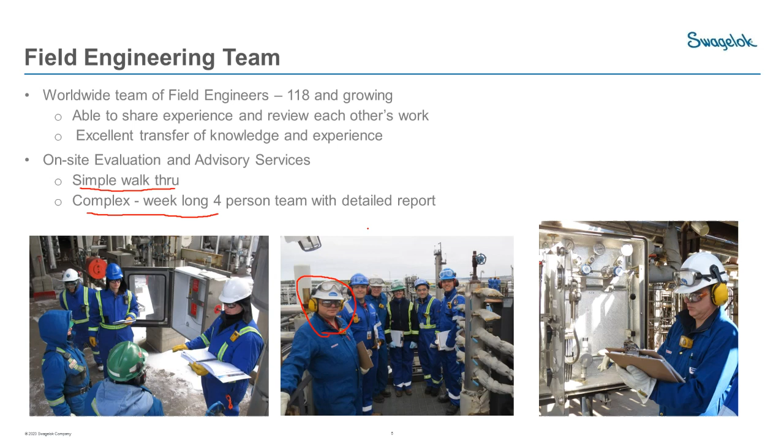One of the things that we have now as a challenge is COVID-19. So rather than send an entire team of folks out to a site, what we are doing is we'll send a limited number of local folks to that site, and then either have them do a virtual tie-in of others off-site using a virtual headset, or they will bring that information back to the off-site folks, and we'll work together on generating that report. So we've continued to do these assessments, and it's been actually quite successful and interesting to do them in the virtual environment that we have today.

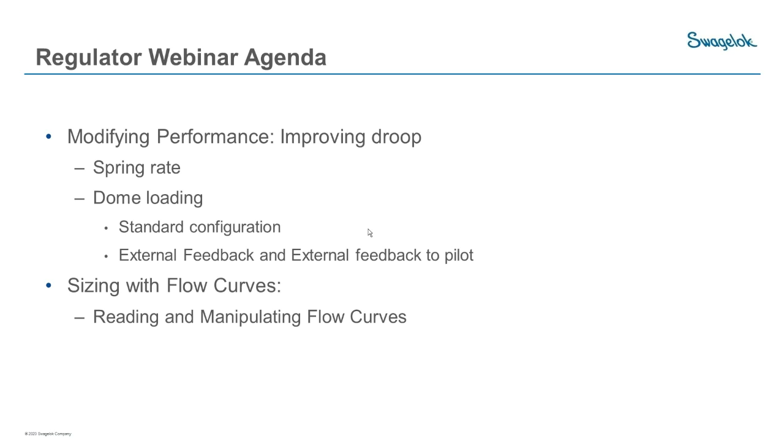A little bit of review from the last presentation. The question, what is a pressure regulator, may seem a basic question, but it's important to realize that it's a mechanical device that's designed to control either upstream or downstream pressure, and it responds to system changes, such as flow, pressure, and temperature. What's important to realize is that a pressure regulator controls pressure.

It does not control flow. So it will modulate flow in response to pressure requirements, but in and of itself, it is not a flow controller. You can't set it to a certain flow. It is going to respond to flow demand and open and close to maintain pressures. So that's a really key takeaway, is that while flow gets modulated, it does not get controlled. It's the pressure that gets controlled.

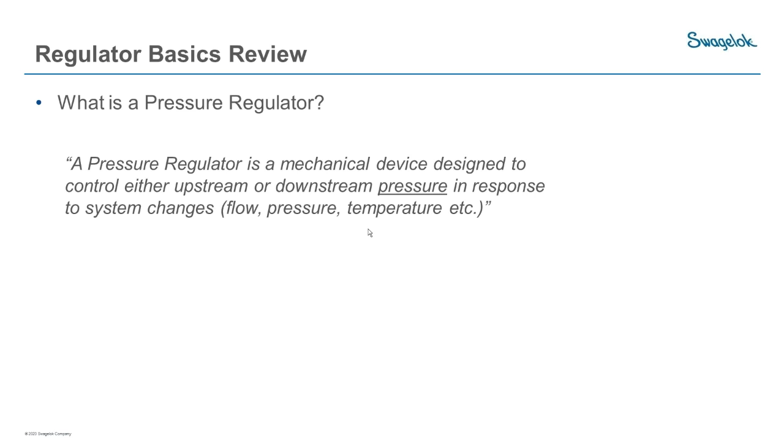So we talked about the balance of forces in a pressure reducing regulator. You'll notice that a lot of times I would call this a forward acting regulator, and simply that means that we have high pressure on one side and a controlled low pressure on the other. The balance of forces equation, we have our set spring up here, our range spring. Whatever setting we apply to that, these forces down below, the outlet pressure force, our inlet pressure force, and our poppet spring force will be equal and opposite to that once the regulator balances.

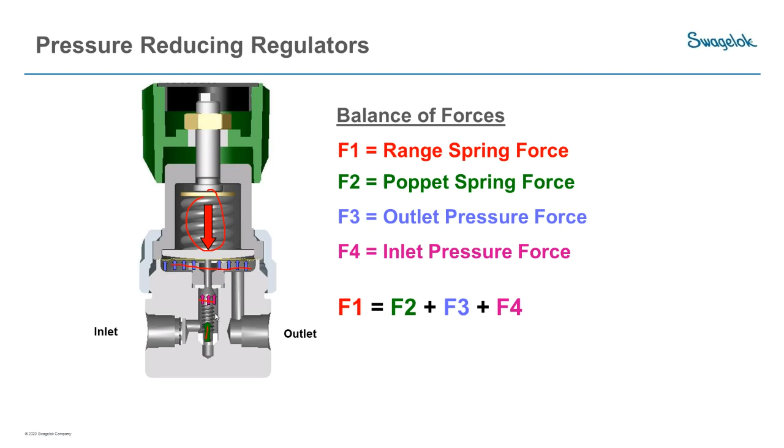Similar with the back pressure regulator, we'll have a balance of forces. You'll notice this back pressure regulator lacks the poppet assembly that the forward acting regulator has. There are back pressure regulators with poppet assemblies in them. This image simply is a regulator that does not have that poppet assembly.

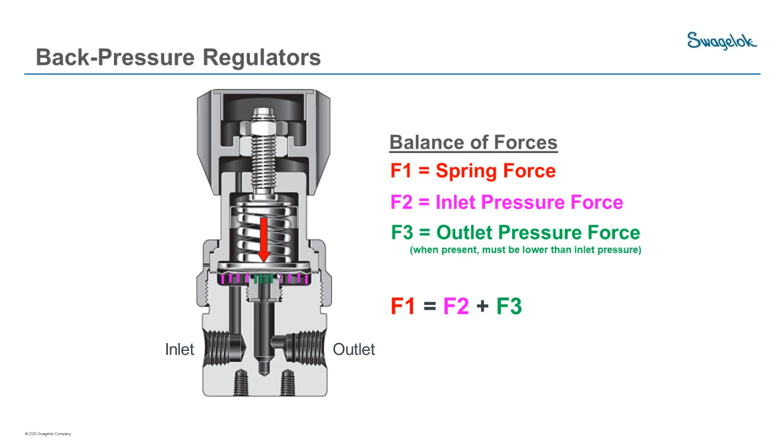So in our last presentation, we talked about these performance criteria. We talked about droop, which we'll look at a lot more today. Choked flow, that maximum flow you can get through the regulator. Creep, what happens to a regulator when it's shut off, but there's some contamination on the seat, where the pressure increases on the outlet. Accumulation, which is similar to droop, but for a back pressure regulator. Lockup at zero flow, Joule-Thomson effect for temperature changes through a regulator, and the optimal flow part of the curve and supply pressure effect. So today, though, we're going to focus on droop.

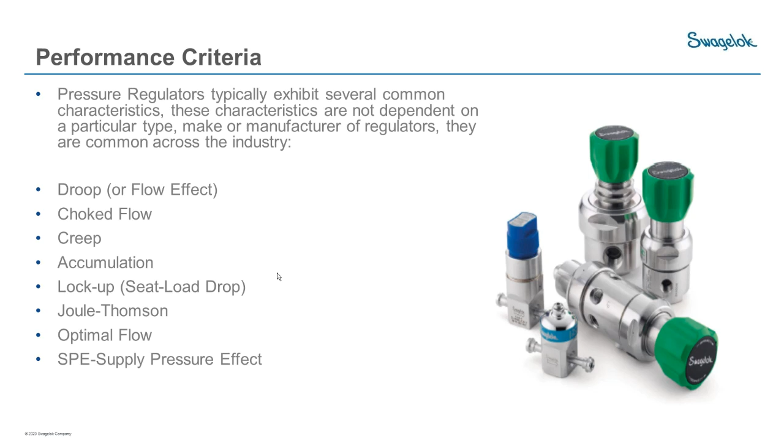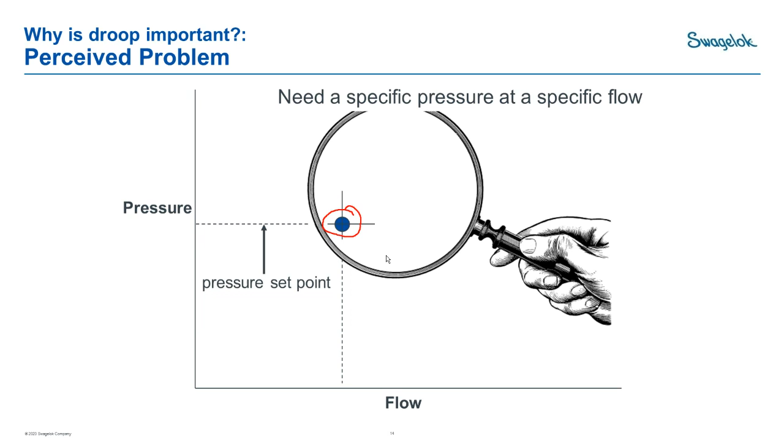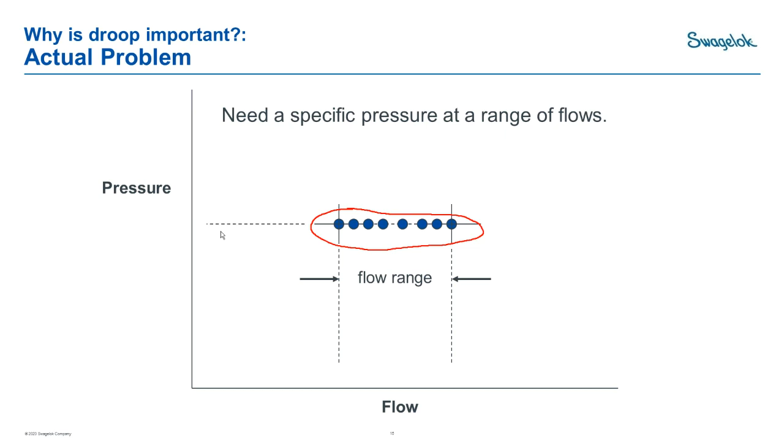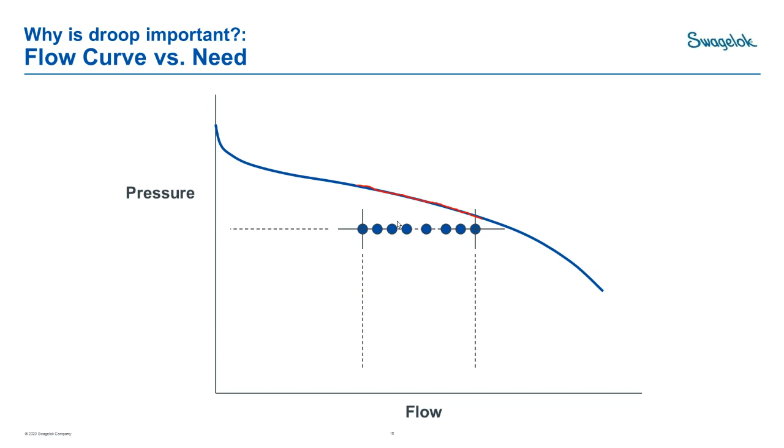So the challenge that we have with a regulator is that the reality of the matter is that we have a certain flow and pressure that we have in mind that we want to operate at. However, the reality of the situation is that our processes are going to work over a flow range, but we still want to maintain that pressure over that flow range. But the reality is that while this is what we want to do, the challenge is that our device is going to follow, our regulator follows this flow curve. So it becomes a challenge of how do we set this device in order to operate well for us.

Similarly, if we would set it at the highest flow, as our flow decreases, our pressure is going to increase to a point where it's no longer acceptable. So that's not optimal in this case.

We could set it out here at just the start of flow, but then our pressure is unacceptably high for our operating conditions. So it's really a challenge.

We could certainly set it to the middle, which is the best practice, really—set your pressure at the middle of your flow range—but maybe that's not good enough. In this case, now none of our pressures really meet what we intended to do with our process.

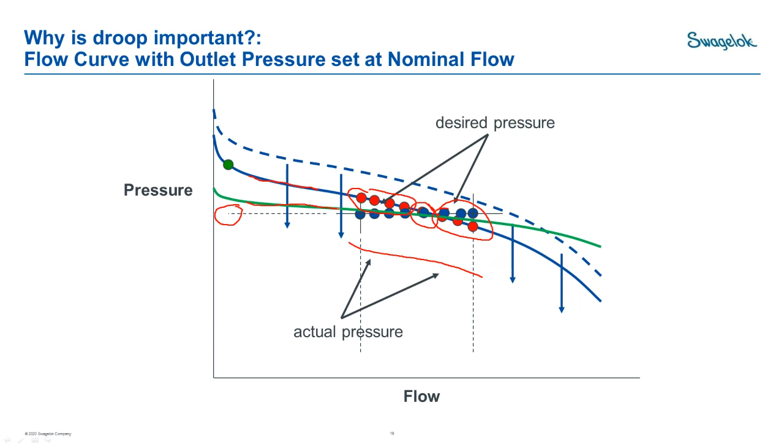So in this case, we really need to come up with a different way of managing our pressure over flow. We really need to flatten that curve, and that means changing the device's characteristics. This characteristic line is how the device works, so we need to go to a different device to get this flatter curve. By different device, I don't mean a totally different system—I mean a regulator with a different internal mechanism.

So let's review why that flow curve exists. We have our balance of forces equation. F1 here is our set spring, and F3 is our outlet pressure force.

When a regulator is balanced or near balance, if our inlet pressure stays the same and our poppet spring force doesn't change by much, we assume those are fixed numbers in this equation. That means whatever F1 does, F3 is doing, or vice versa—whatever F3 does, F1 will follow suit.

Here's what happens when flow demand increases on the outlet side of the regulator: this poppet, in order to allow more flow, needs to move down. When it moves down, this loading plate moves down too, which means this spring is extending—so the spring is actually losing some of its set force.

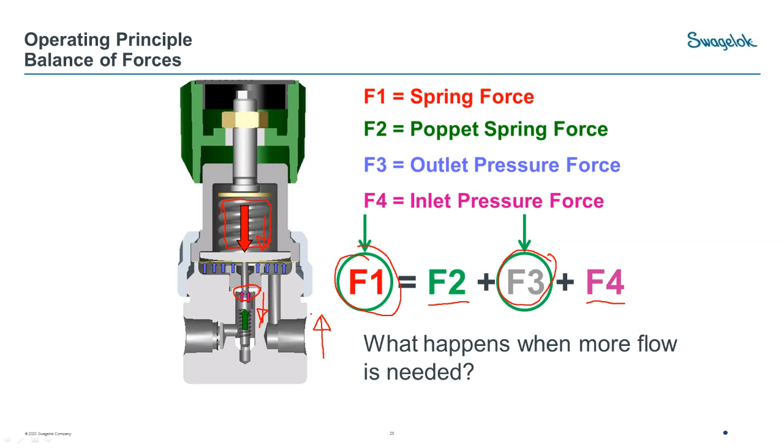This is what's driving it—since our set spring is losing a bit of force, our outlet pressure loses a bit of force to balance out. So since it's our spring that's creating that situation, what could we do to modify our spring to make that situation different?

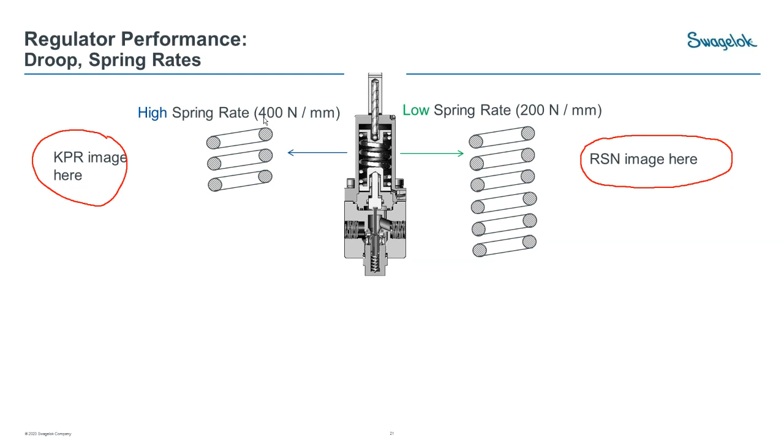Here we have an example of a short spring and a long spring. This short spring is typical of our KPR instrumentation regulator, whereas the longer spring is typical of our RSN process-type regulator. The shorter spring has twice the spring rate of the longer spring, and we're going to look at why that's important.

In order to get the same set force on each of these springs, the longer spring needs to be compressed by twice as much—16 millimeters instead of 8 millimeters. So for every unit of length change on this spring, you get half as much force change as you do on the shorter spring.

So if the poppet moves down by 2.5 millimeters, we lose 1,000 newtons on the shorter spring, while we only lose 500 newtons on the longer spring. Ultimately, for two regulators with the same control range, we get a droop of 3.2 bar on the shorter spring and 1.6 bar on the longer spring. By using a lower spring rate and a longer spring, we get much better droop performance—it flattens that curve out.

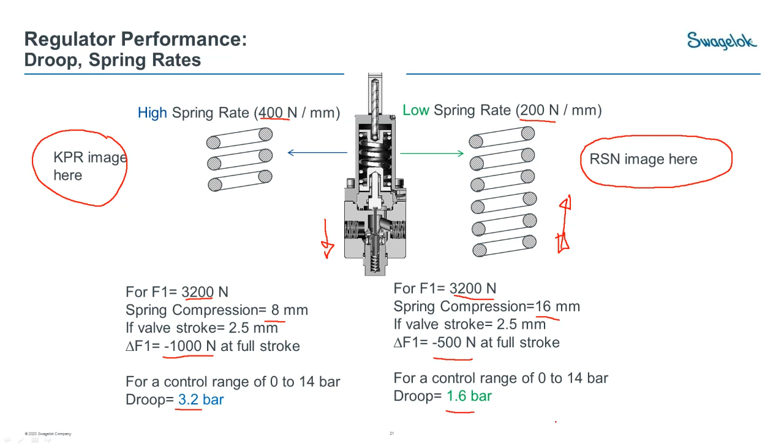That's one way of flattening the curve. Another way is to replace our loading spring with a compressed gas—we call that dome loading. What we discover is that the dome-loaded curves are super flat.

On the left here, you can see 90 SCFM as the right-hand side of this chart. On the right-hand chart, 90 SCFM is just here—this chart actually has a factor of 10, so it's 900 SCFM at the extreme end. Just look how flat these droop curves are. That's the advantage of dome loading.

We take away the spring rate that is involved with this mechanical spring. So I'm going to go back to that slide for a second.

You may be looking at this now and saying, 'Oh yeah, dome loading is the way to go every time,' and that's not true. The spring-loaded regulator is an excellent regulator—it's a very good fit for a lot of applications. But it needs to be applied properly, and it needs to be understood that it follows this curve.

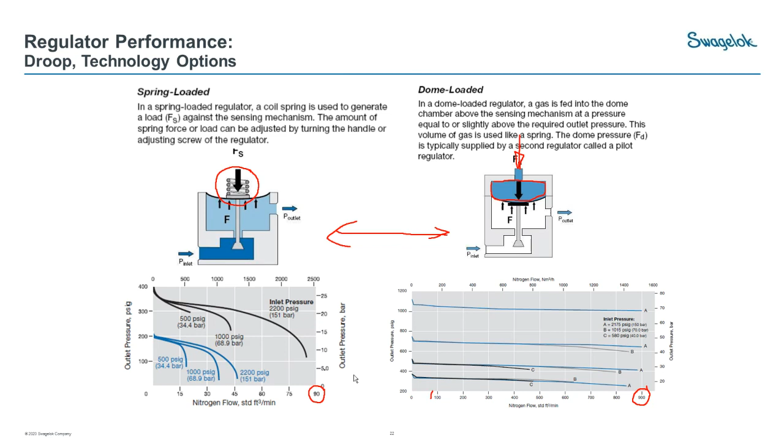We always want to choose the most cost-effective solution for the challenge that we face. And the spring-loaded regulators have got, they're excellent. They've got a really good place in our systems.

So with a dome-loaded regulator, typically you will have a pilot regulator, and thus the added complexity. Now, you may be recalling our previous slide where we just got rid of a spring-loaded regulator, and now you're putting a spring-loaded regulator back in here. So the question sometimes is, well, doesn't this regulator cause droop once again? And the answer is no, it doesn't, and here's why.

This pilot regulator is set up to provide pressure to this dome. We have our inlet pressure on this side, we have our downstream pressure on this side. The dome loaded unit is being fed our pilot pressure here. But then we have a bleed off that comes back into our downstream, and it's got an orifice plate in it, so it limits flow.

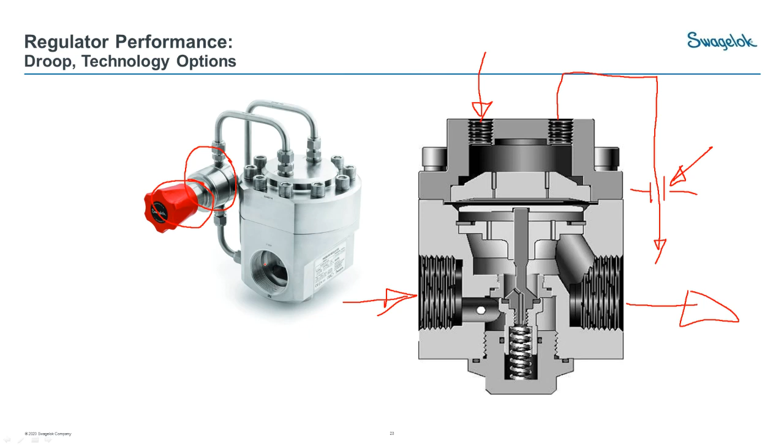This pilot regulator, because we have this flow orifice here, is going to see constant flow or nearly constant flow. So once we set this regulator to a setting, it's going to stay there. Yes, it's subject to supply pressure effect, it's also subject to droop. However, by setting it up off to the side so that it's basically in its own flow loop, we give that regulator its best chance of staying in a small zone of that curve.

So this regulator itself will not be subject to any significant droop characteristic, and so then we gain this wonderful ability of the dome loaded regulator to perform over a wide series of flows.

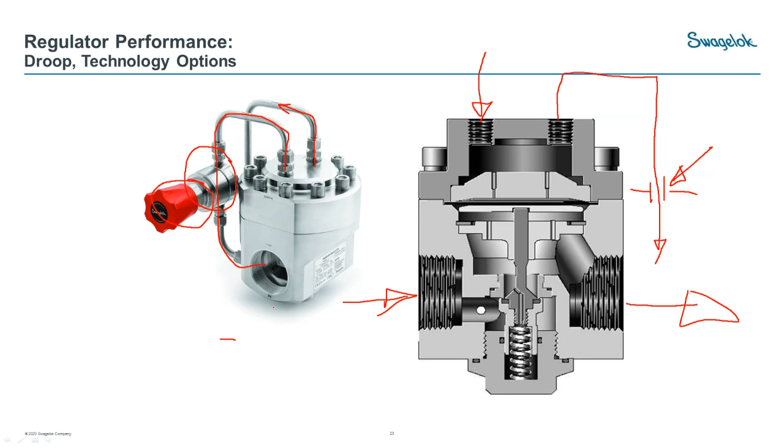Now that we've looked at the theory of it, let's look at some of the practicality of how that dome loaded regulator actually works. So when we have no pilot pressure up here in our dome, this poppet is going to be shut, and we will have the same no pressure situation here in the sensing chamber.

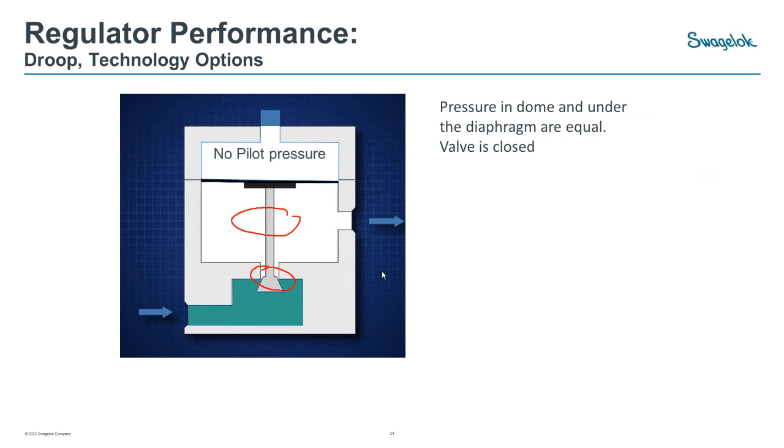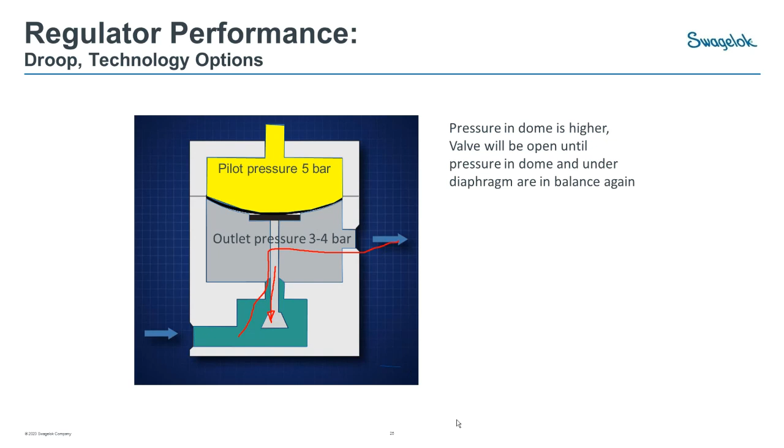When we apply a pilot pressure to the dome chamber, that's going to drive our poppet down, and we're going to open up to flow, and that flow will continue until we reach a balanced situation of 5 bar above and below our diaphragm. This is a setup with equal areas on both sides, so we will balance out at 5 bar.

At that point, the poppet closes, and the regulator waits for downstream demand. Once this downstream demand depletes this 5 bar, we will open up again, and this regulator will balance itself out at whatever flow rate is downstream, and continue to flow to balance that downstream.

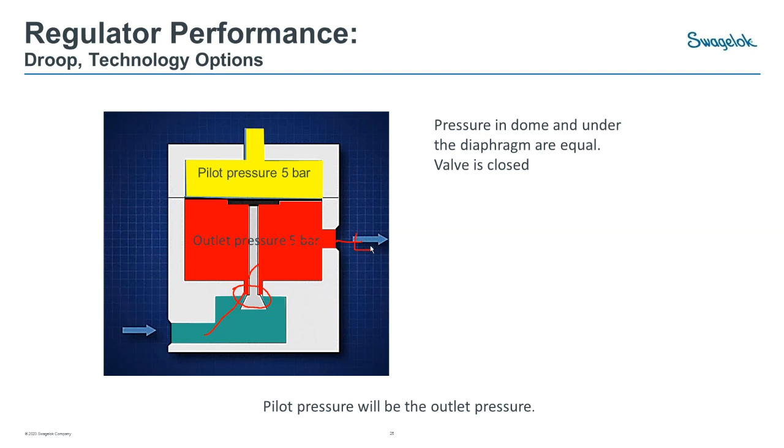So here's another representation of the piloting setup of that dome loaded regulator. You can see here that we have our pilot regulator with the spring. We are taking its supply pressure off of the main supply pressure to the main regulator, and providing that to the dome in a flowing situation, a constant flow situation.

You can see here in the construction of this dome that you've got a support plate behind the diaphragm. This is to prevent the diaphragm from extruding itself like a balloon through this cavity. The dome pressure makes its way through that support plate through these holes.

Down here in the process stream side, we have our inlet pressure coming into our poppet zone. This is a balanced poppet where we've got our outlet pressure underneath the poppet and above the poppet. So there's a drilling in the poppet that balances it. This helps with the droop characteristic as well.

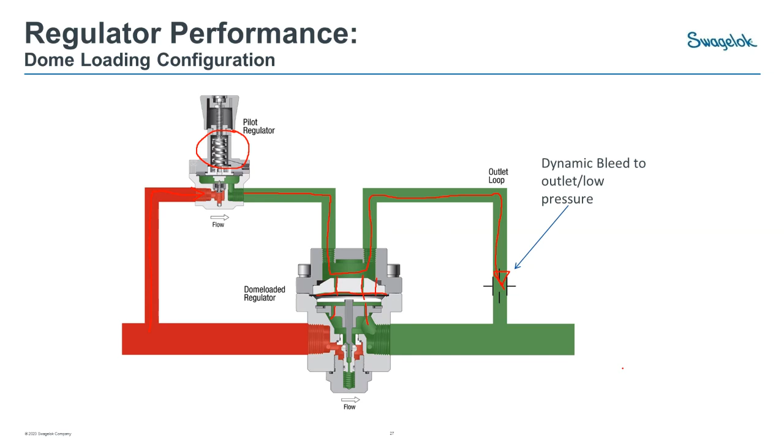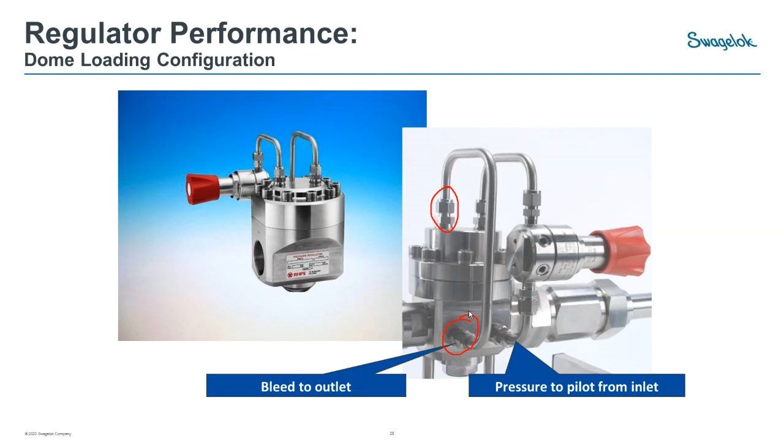As I've mentioned, we do have a flow orifice in the system that manages flow. That's something important to keep in mind: if you're ever working on a dome-loaded regulator, somewhere on this setup you will find a flow control orifice. We sometimes put it into the body in this body fitting, but more often than not it's machined into a fitting, and you need to be careful not to mix the fittings up, or at least be aware that one of the fittings will be different.

So that's managing droop in regulators, and some of the ways that we can do that.

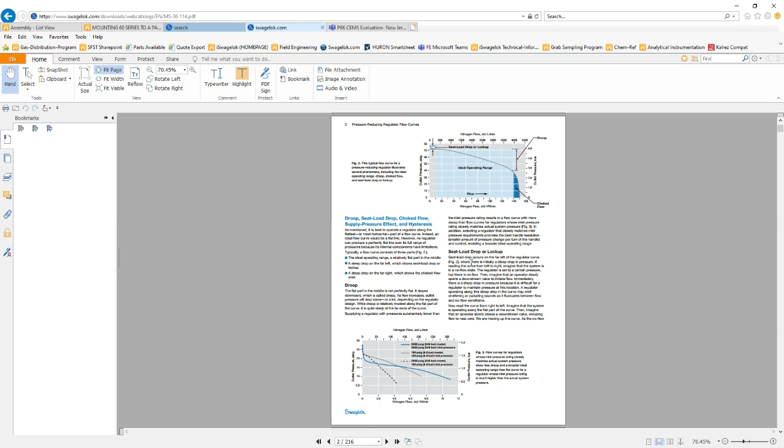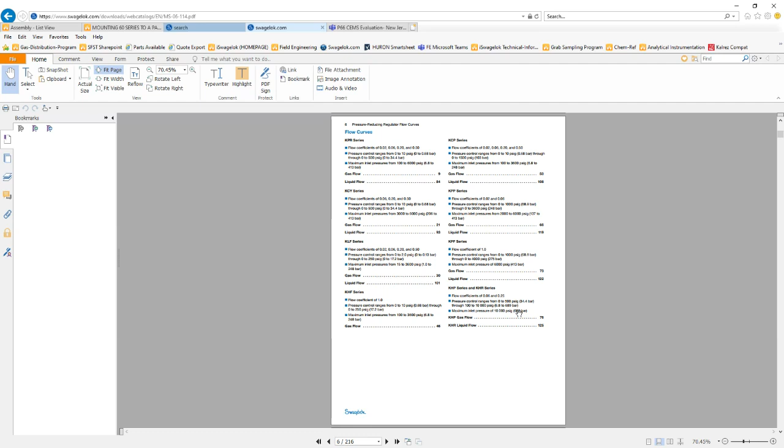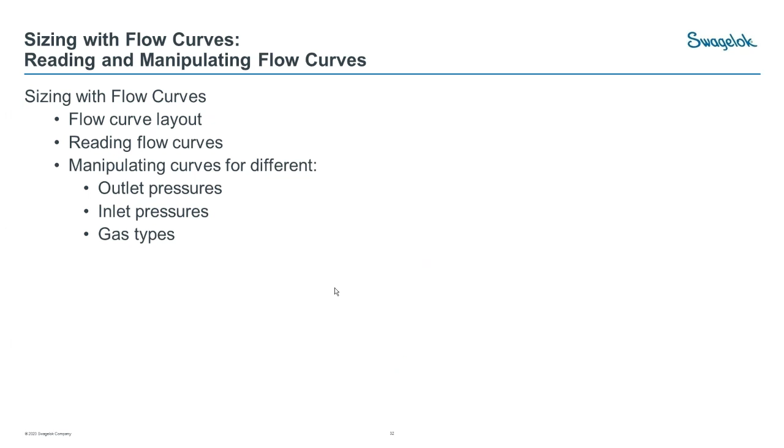It's got 236 pages, don't be daunted by that. Most of those pages are not text, they're simply charts, and it's very quick and easy to hone in on which particular pages you need. There are some good explanation pages here of the different characteristics and some of the manipulations you can do with the curves. The nice thing is, if you're looking at a KPR regulator, you can very quickly get to gas flow or liquid flow curves, or a KPP, same thing. So we've got some nice links here that you can jump to that particular part of the technical bulletin. We're going to go through some details on the flow curves, the layouts, how to read them, and how to manipulate them.

The first thing you're going to notice on our flow curves is that there's multiple curves on each chart. The reason for that is really twofold. First of all, so you can compare similar or the same regulator with different characteristics. As well, if we made a single chart for each set of lines, we would have had 600 pages or more in the catalog.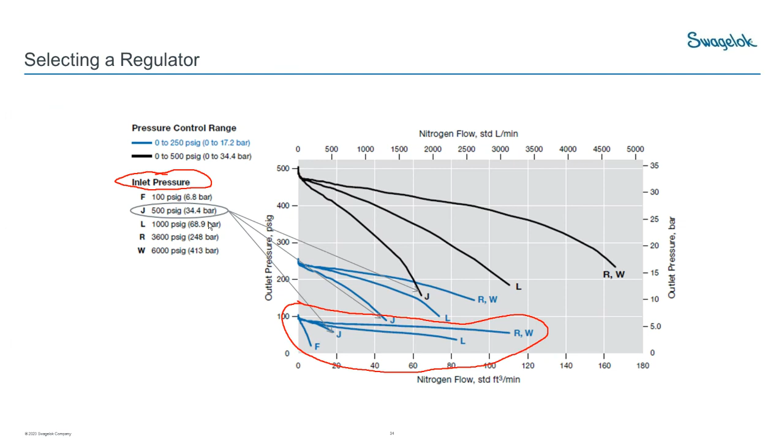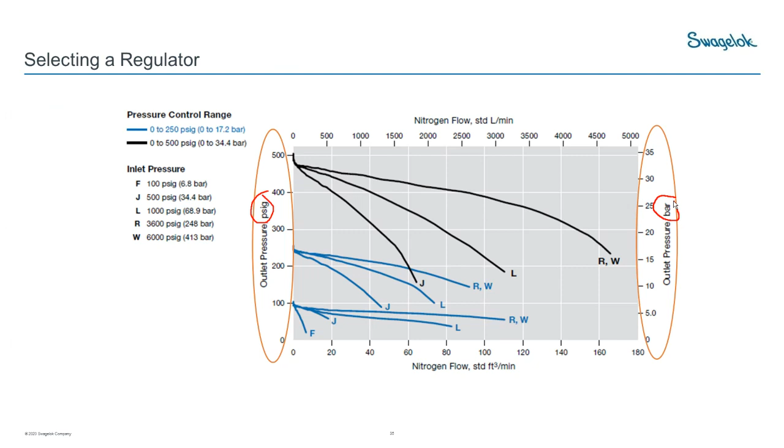So it's quite a big influence over the operation of a regulator, what kind of pressure you're feeding it. Next we have outlet pressure, which is our vertical axis, and you'll see it's PSI on the left and bar on the right. So whether you're working in metric or imperial units, the charts are very easy to read. Similar for flow, SCFM on the bottom, and standard liters per minute on the top—very easy to move from one to the other without having to do a calculation.

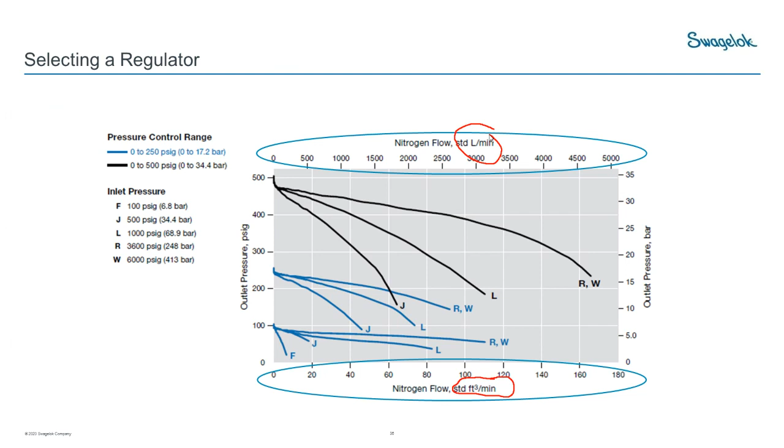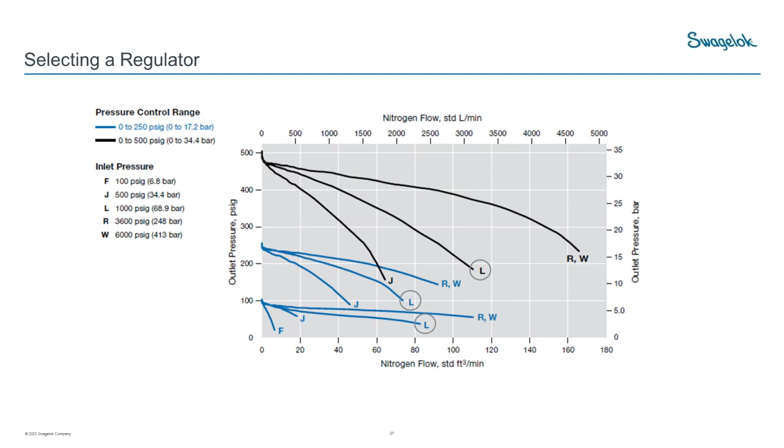Okay, so we're going to go through some examples. This is really the best way to become comfortable with these charts. This first example, we're going to be looking at the 1,000 psi inlet pressure. We've got a nitrogen flow, so that's important—the type of gas flowing through will change the way this axis behaves. All of our charts are done in nitrogen, so this example is a nice starting example. Our flow rate is 25 SCFM, so right around here. We've already circled our 1,000 psi curve, letter L, and our pressure setting is going to be 175 psi, so somewhere around there.

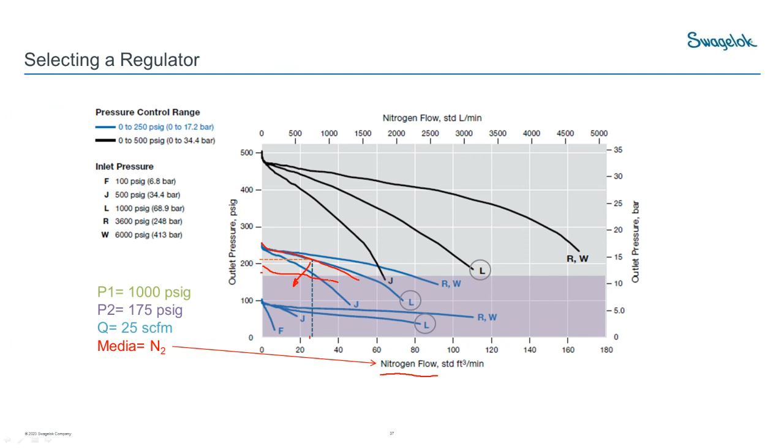When we project our 25 SCFM line up, the second curve that we hit, for the 1,000 psi inlet, comes across at a little over 200, maybe 210 psi. But we know we're going to be setting the regulator at 175 psi, which is right where this purple shading ends. The interesting thing is we can actually shift that line down—this line here should look like this one here. We can shift this line down, and we know it's going to perform similarly with the 1,000 psi at a lower set pressure, and we know that droop curve applies. We're going to look at another example here, and again, at any time, please send questions through.

I've got a number of examples here, and if there's a question, we can always go back to one of these and dig a little bit deeper.

So this next regulator here, the question that is asked is, what is our pressure drop? So droop and lockup for this LRS4. It's got a 1/2 inch inlet outlet on it, when the flow increases from 0, so from lockup, to 150 normal cubic meters per hour.

Okay, so this chart here has got normal cubic meters per hour at the top, and it's got SCFM on the bottom. Something important to note is that when the charts have got normal cubic meters per hour at the top, see how the order of magnitude of the numbers is very similar to what's on the bottom. So you really have to be careful with charts with those two scales on it, not to use one instead of the other, especially if here's 150 and here's 150. Easy to make that error.

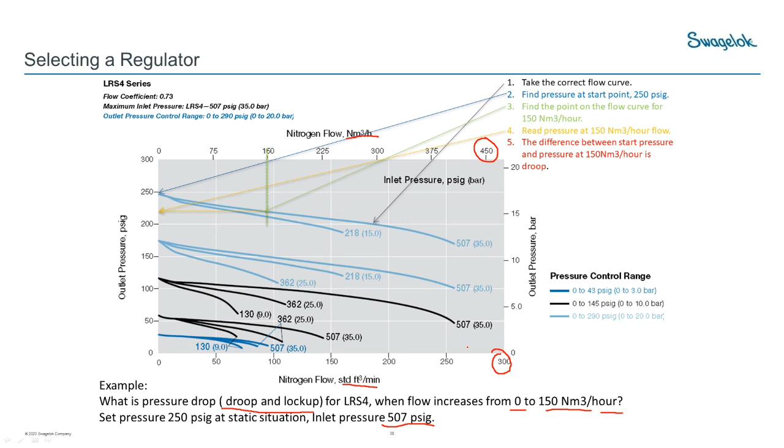Next, we want to find the point on the flow curve for 150 normal cubic meters per hour. So we want to go from that top scale and drop down and find where it crosses the curve. And then we're going to move that across to our pressure scale, and we can read the pressure, which is around 220 psi, and we take the difference between the start and the end pressures, and that's droop.

So the difference between those is about 30 psi. So the answer to the question, what is our droop and lockup for this particular regulator? Our droop and lockup is 30 psi. And if you wanted to know what that was in bar, you could look at the other side here, and you would conclude that it's about 2 bar.

So that's a typical way of using a set of flow curves. Once you have settled on, okay, this looks like the regulator for me, now we dig deeper on that curve and see what it does as it performs in its range.

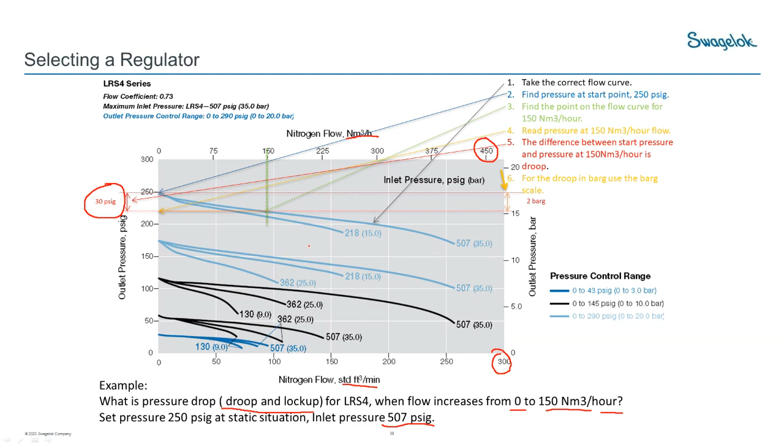So that's how we use the flow curves bulletin. We know what our theoretical set point of pressure is, and what flow rate, maybe flow range, and we start looking through our flow curve technical bulletin to find a set of curves that fits. And once we find, and usually there's 2 or 3 curves that will fit, maybe even more, then we start to look at these particular details of what happens when and if this happens.

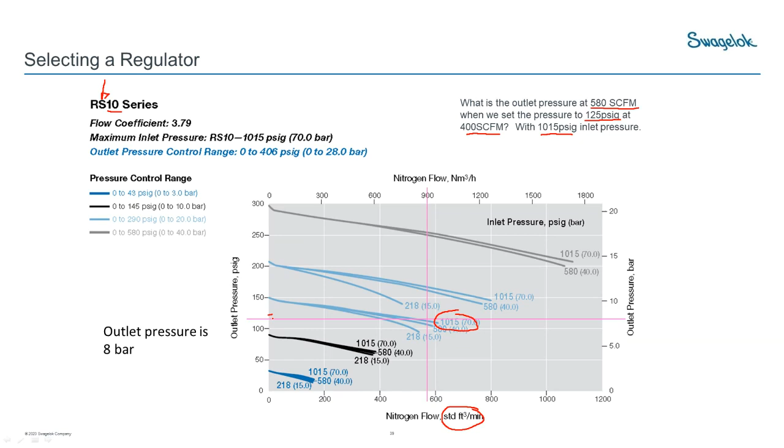Okay, so now we're going to go to this LPRS10, a low pressure regulator. The question here is, what will be our pressure at no flow? We've got an inlet pressure of 15 bar, and a dynamic, flowing pressure of 2¼ bar at 500 normal cubic meters.

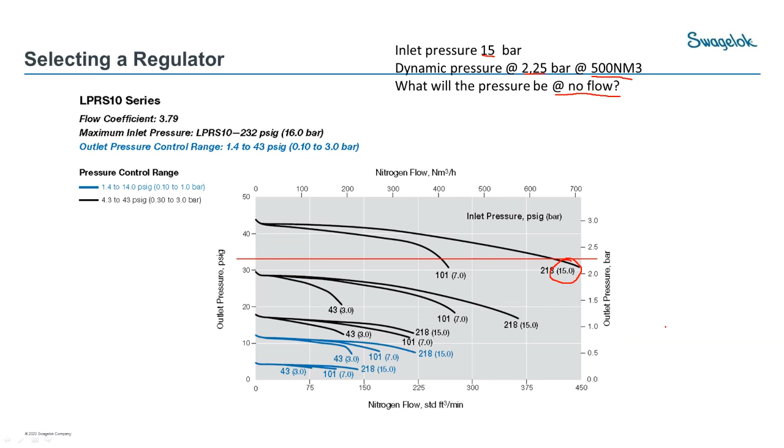So we first put our line across at 2¼ bar, and we look at our 15 bar inlet pressure line here. So we are right here. What we need to do is take this curve and move it so it lines up with that point right there.

In this case, we're representing that moved line by this straight line. I apologize, it doesn't have a curve to it, but it is a good representation of what is going on, with a similar slope. One thing to note is that it's okay to move these lines down towards zero, zero. It's not okay to move them up. Moving them up isn't effective because there are mechanical limitations inside a regulator that come into play, that when you try moving a curve up, it's just not reflective of what the regulator is doing. But to move it down is quite reflective.

So in this case, we have our dynamic flowing at 2¼ bar, 500 normal cubic meters. Our curve is going through there, and the question was, what will be the pressure at no flow? So this approximated straight line looks like it's going to cross at around 40 psi, or in bar, right around here, so probably 2.75. Okay, so that is our lockup pressure, 2.75.

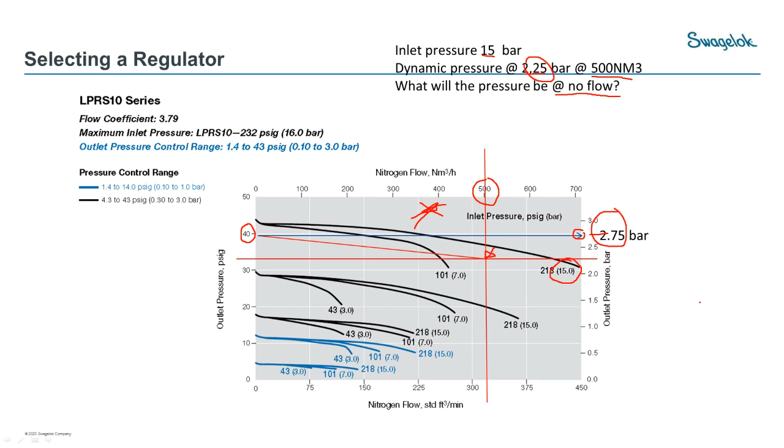Okay, so now what we'll do is we're going to look at a dome-loaded regulator. It's got the D in the part number. But we're also going to change things up a bit. So all the other curves that we looked at, we were looking at nitrogen, which made it easy because our curves are done in nitrogen. But now we're going to look at hydrogen, a really, really light molecule.

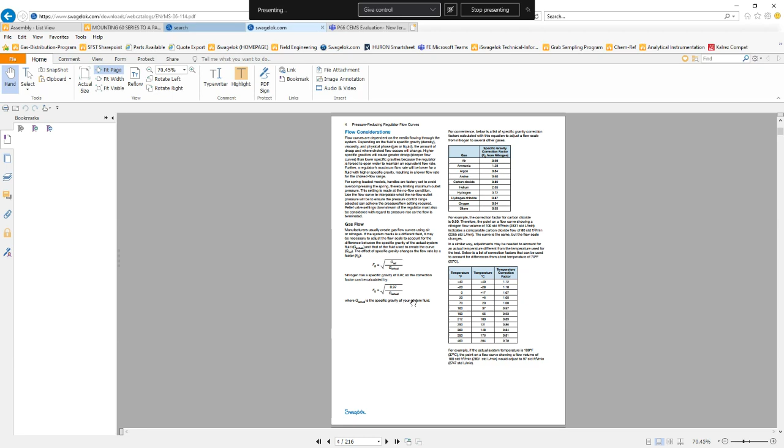So we've got this 3,800 normal cubic meters per hour flow. The temptation might be to just look at the chart and go, well, we've got 3,800s here, oh, that's way out there. You need to resist that temptation because hydrogen and nitrogen, these scales are vastly different. So we address that in the flow curve technical bulletin. On page 4, we have an explanation and formula that show how to adjust the curves based on the gas's specific gravity.

So that's what we're doing here. When we run through our conversion calculation, we discover that there's a correction factor from nitrogen to hydrogen of 3.8. So whatever happens on this scale here, we need to multiply by 3.8. That means that 3,800 normal cubic meters of hydrogen is going to have the same flow characteristic as 1,000 cubic meters per hour of nitrogen. So this is 3,800 of hydrogen.

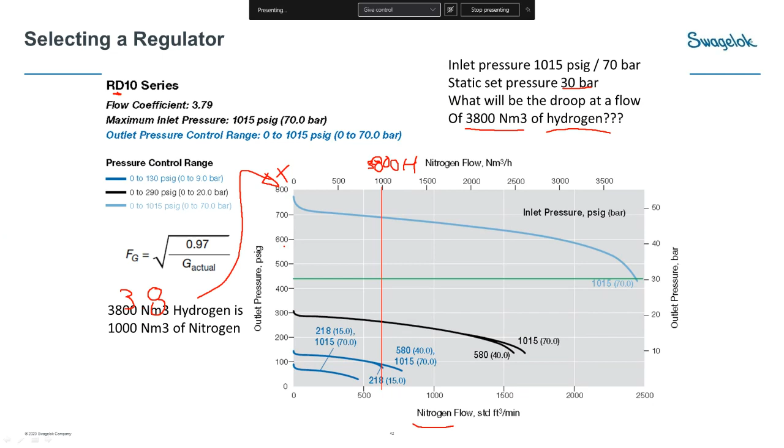So the question was, what's going to be the droop at this flow? If we set our static pressure at 30 bars, that means zero flow. All right, so at zero flow, we're going to have 30 bar, and that's our 3,800. So there's 30 bar, zero flow. We're going to take this curve, we're going to move it down. There we go.

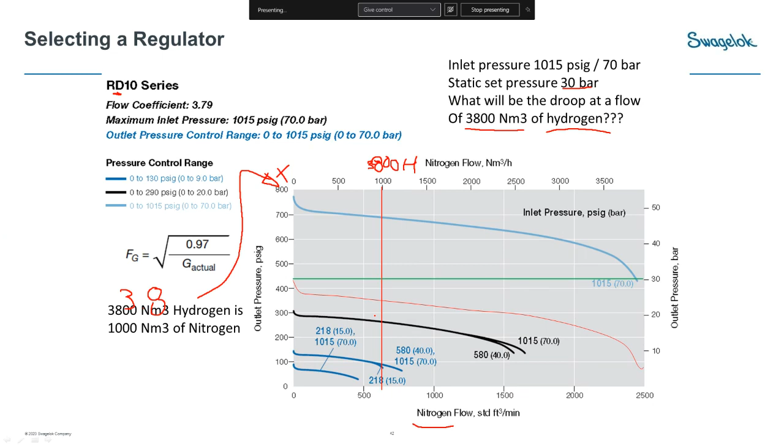We're going to then look at where it's crossing here, and that's going to tell us our pressure at that flow. So we see that now we're crossing around, having that droop be about 5 bars. So it's around 25 bar right here. So we've dropped 5 bar. Similar to what we've done on all the other curves, the only wrinkle here was that we utilized our correction factor, because we realized that hydrogen is going to flow at a much higher rate than nitrogen for a given set of circumstances.

Ultimately, the most important thing to know is that correction factors exist, and what you're doing is multiplying this scale by the correction factor, whatever that is. I find it's best to actually write the scale above, so I would write 3,800 and all the hydrogen flows above this scale, and work with it that way. Typically what I'll do is take our flow curve technical bulletin and, using a PDF editor, put lines and notations on it in order to not only work my way through the process, but also have a document to refer to in the future.

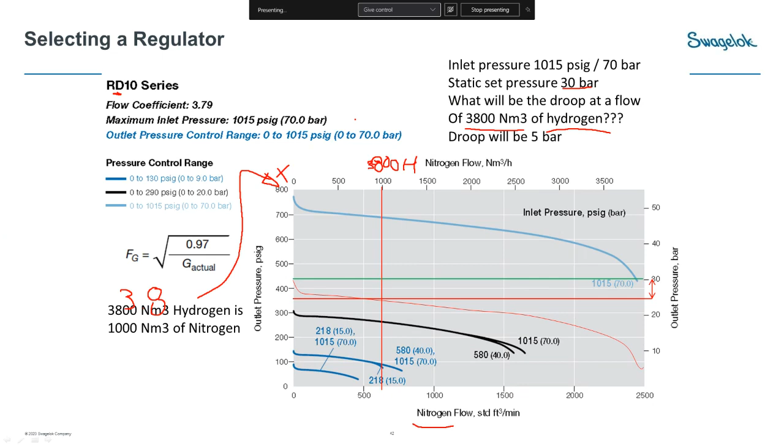So those are all the examples that I have of flow curves and how to use the flow curves. We already looked at this flow curve technical bulletin. There is one other interesting tool that we have on our website. If I go back to swagelok.com, the easiest way is, I'll just go back this way.

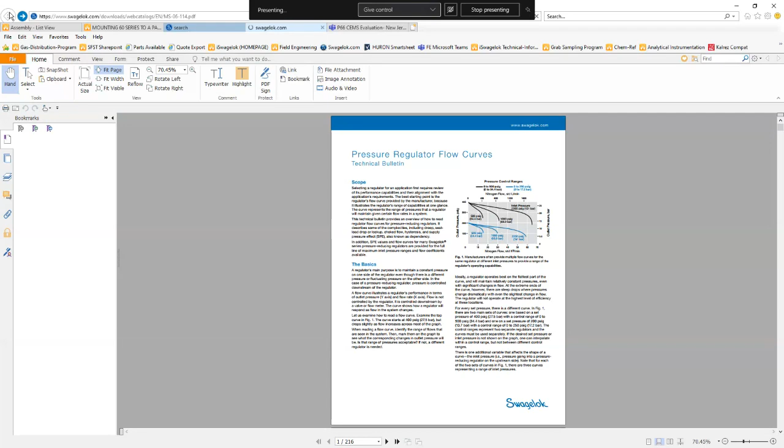There we go. All right.

We have this toolbox link, and we've got some really nice tools here. This is swagelok.com. We have CAD files and sales drawings, which includes 3D models of the bulk of our product line in various formats. It's really handy for design.

Certifications, you can access CRN documentation there. We have a CV calculator, so with your pressure and flow, or your pressure or your flow, you can find out your CV required, or vice versa.

And here we have our regulator flow curve generator. This generator has some limitations, so you do need to read through this page. Please do that before you click the green link that gets you there.

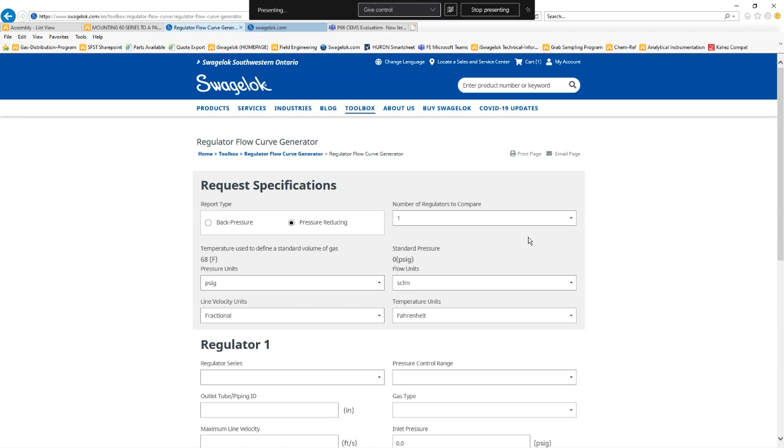Once you get here, the nice thing is with RHPS regulators, you can compare up to 4 regulators, and you can put in the information for those 4 regulators. The curve generator, once you get to the bottom and hit calculate, outputs a nice set of curves.

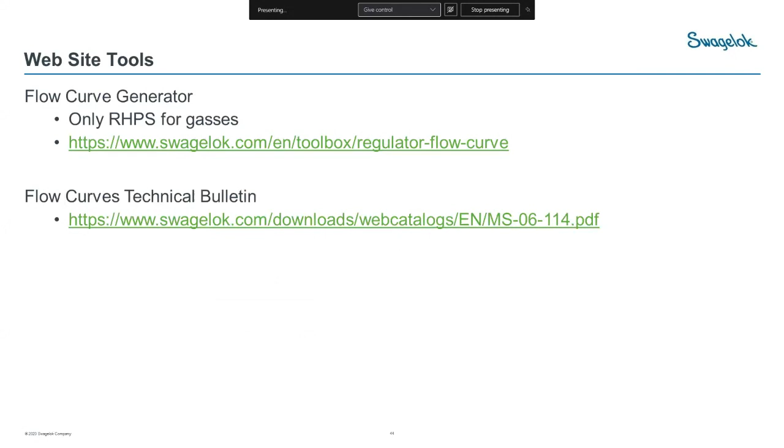I did this earlier today, did this set of curves. This was for 3 separate regulators, and I thought it would be interesting for you to see.

The nice thing with this is that rather than have the static set of curves that are in the flow curves technical bulletin, where you really need to manually move the curve down, you can set your parameters so that you get this flow curve.

In this case, your initial setting was 40 psi at 0 flow. Well, you could actually say, I want 40 psi at 25 SCFM. So I'm going to adjust the parameter I put into the data page, adjust it up by 3 psi. I'll put 43 in, and you can have that curve cross right at that 25 SCFM.

So here I did 3 regulators for this example, and I did the same regulator, an RSH4, and what I did is I varied the inlet pressure. Outlet pressure of 40 psi in all the cases. I changed the inlet pressure from 250 to 500.

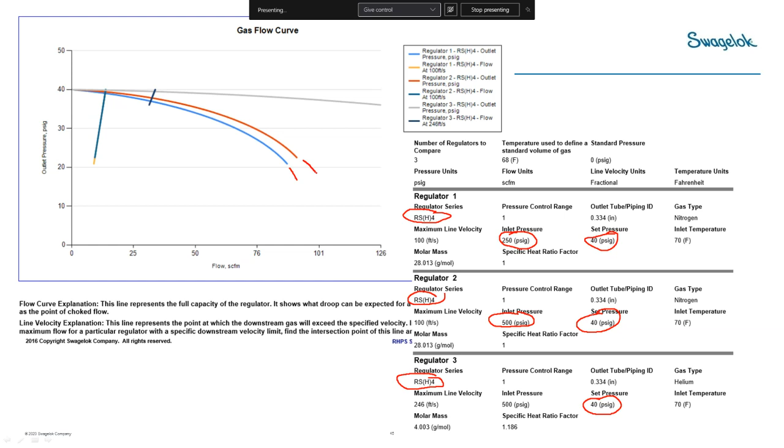You can see that here. We have our 250 here, our 500 is here. Those 2 were for nitrogen. Then the third one I did for helium, just to see what the helium curve would look like. I did an inlet of 500 psi. You can see how much more flat that helium curve is, for that nice small molecule that flows nicely.

There is one interesting thing that I want to point out on these curves that's different than anything else we've looked at through the rest of the presentation. We have this line velocity line here, these 2 here.

What those line velocities represent is that over time, gas handling folks have developed empirical knowledge that says at certain line velocities—the actual velocity of your fluid flowing through your device or your pipe or your tube—when it exceeds a certain velocity, it starts to create noise.

Over time, they've empirically observed that when you get beyond that velocity, you hear noise. That's what this line is representing: ideally, if you don't want any noise coming from your system, stay to the left of these lines.

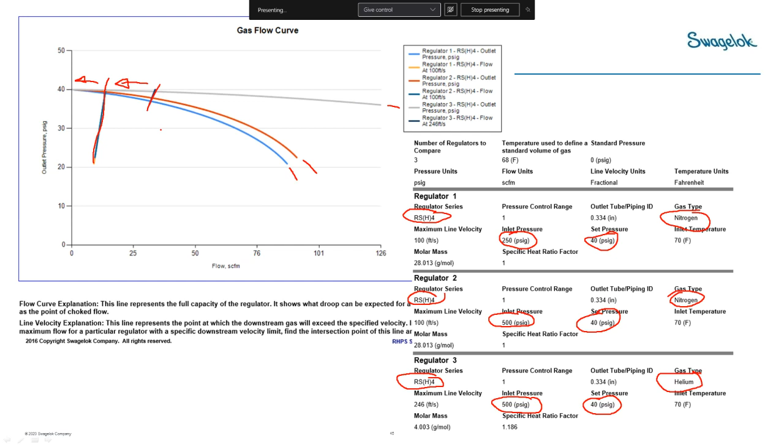So to review, the droop performance is the thing that we look at the most and has the greatest effect. It's also the most noticeable thing for end users. For spring-loaded regulators, that droop is directly related to the spring rate, so a longer spring means less droop on that unit. We can improve our droop by making that spring longer, or by choosing a dome-loaded configuration and tweaking that dome-loaded configuration to give better feedback and control.

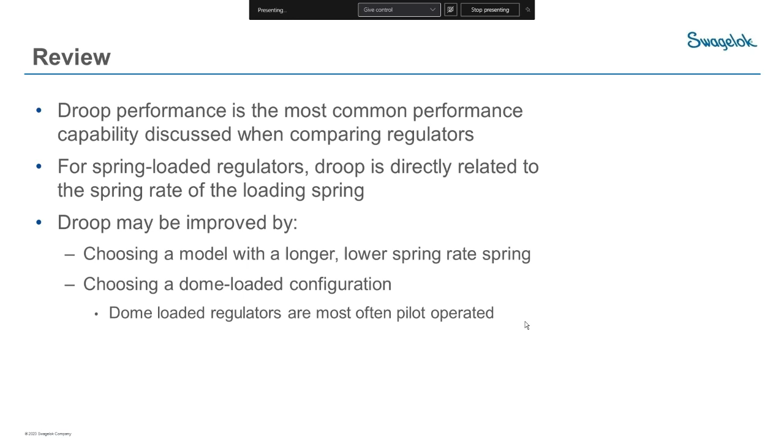The flow curves allow us to pick the right regulator for the job and look at what's going to happen as far as pressure drop, lockup, and the droop profile over the flow range. And we now know that we can pull curves down, that the inlet pressure will modify that droop profile, and that we need to adjust our flow axis for our gas type.

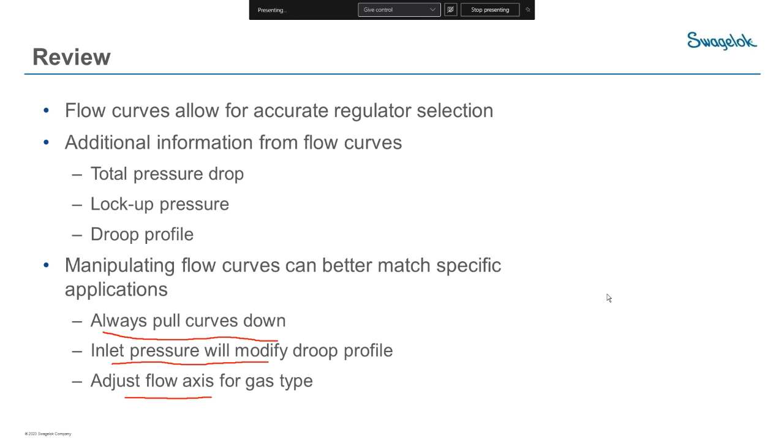So I'm hoping that this information has demystified those curves for those in attendance today. I'm sure there's questions. Do we have questions in the chat? If there aren't any questions in the chat, please be sure to get in touch with us with any questions.

So Katie, do you? Yes Rich, we do have a few questions. I'll start in order. The first question that came through is: is it always best to have a low spring rate, or does that affect response time or price to a considerable amount?

The answer is it depends, and it really depends on the application. The larger you make a regulator, the more it's going to cost. There are a few trade-offs that happen. To get a longer spring, you need to have a larger regulator. Hence the regulator is heavier, and it takes up more real estate, so you may not have the space in your setup to accommodate this larger, heavier regulator. If you don't need the larger, heavier regulator, it doesn't make a whole lot of sense to go towards it. It really needs to fit your application. If you need a smooth response with low droop over a range of flows, then you may need to use that longer spring regulator. However, if your flow band is typically fairly narrow, and the amount of pressure variation over that narrow band is acceptable, then I would start with the smaller, more compact short spring regulator.